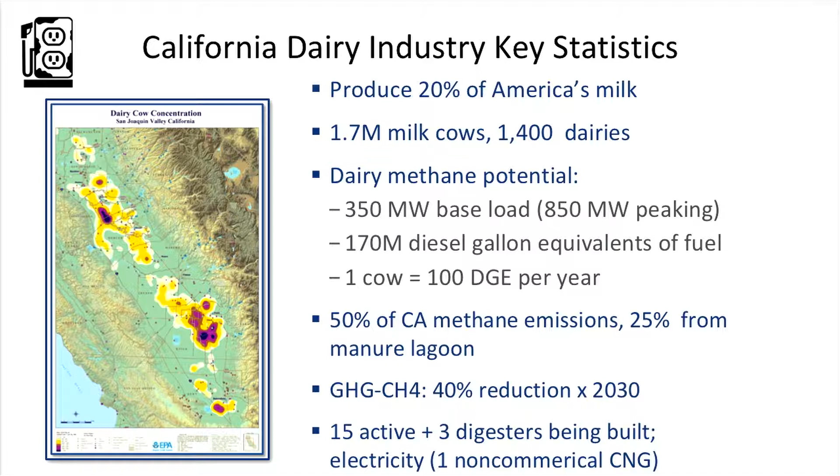The dairy industry in the state produces about 50% of California methane emissions, and then half of that comes from how manure is managed. And so I'm going to show you a bit of how that's done and how we capture it. And the requirement is a 40% reduction of greenhouse gas emissions from dairy manure methane by 2030. To date, there are 15 active dairy digesters, while there are 1,400 dairies, so it's about 1% right now. But there's a lot of development and a lot of activity.

And what's also important is all the existing dairy digesters, with one non-commercial exception, produce electricity. And there's a significant incentive and encouragement for us now to be putting that gas into the pipeline and have it be used to power trucks and buses in the Central Valley. There are major government incentives right now. Just to give you a little bit of background, there are 2 incentive programs to help put initial projects, biomethane, into the gas pipeline. The California Department of Food and Agriculture, from GGRF funding, provided $35 million of grants in 2017 for dairy digesters, and that number increases to $76 million next year.

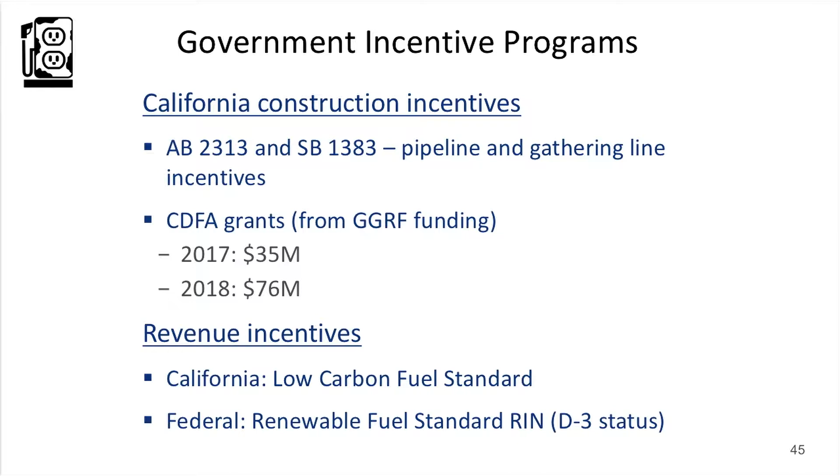And on the revenue incentive side, there are actually 3. I have 2 here. There's, of course, the low carbon fuel standard from California. There's the federal RIN program. And on the electricity side, there's a BioMAT program, which is a feed-in tariff from bioenergy sources, with 90 megawatts coming from dairy and other ag sources. On an investment basis from the state perspective, dairy methane capture is one of the most cost efficient. This is the result of a Legislative Analyst's Office study, and it's about $8 per metric ton of grant funding, government support, which makes it, in this chart, the 3rd most cost effective.

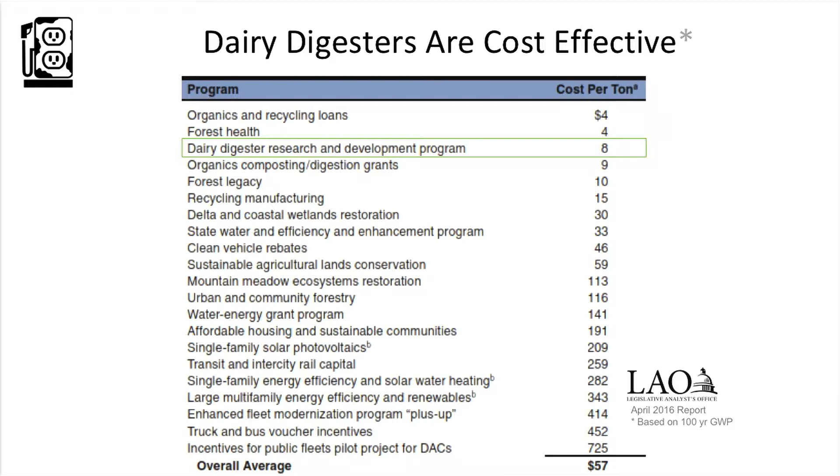So our company was founded in Bakersfield at Wool Growers, if people know the local Basque restaurant, in 2006. And that was a pivotal dinner where I met with 10 of the local dairy farmers, and they helped us create the company. And we thought things would move very quickly, and I had more of a background in technology, and the support structure that I just referred to from the state really only came into place over the past couple of years. And so it was many years of very close work with the Sacramento policymakers and others in helping to develop the incentive programs, and working very, very closely with the dairy industry to make sure these programs work for the industry.

We have built 3 projects. We're completing 3 right now. We're beginning 10 more, and we're designing 25 more as we speak. We were very fortunate that we won grant funding for 10 new projects at the end of October, and that really is going to help define our work for roughly the next 18 months.

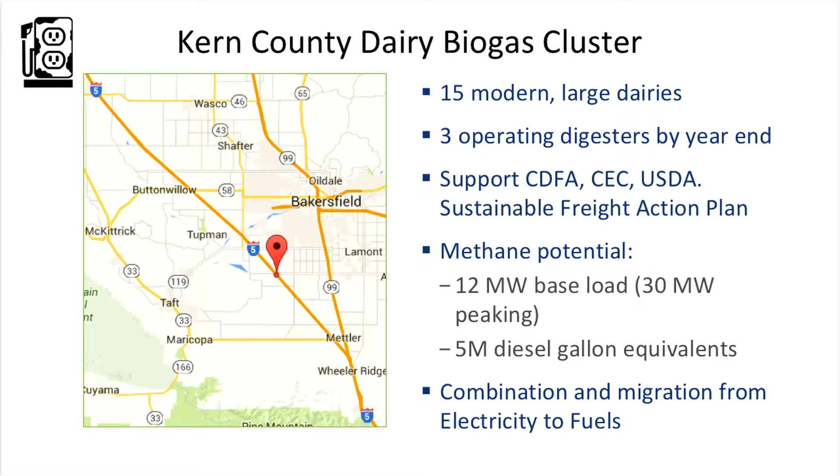And locally, I could not be more grateful for the support that we've had from Kern County, from across the team in Kern County. Lorelei has been very, very helpful to us. And Craig, I wanted you to know that you shouldn't be surprised if you get a phone call from us in the near future about maybe a change or 2. But otherwise, we're very grateful for that working relationship with the county.

The Kern cluster has the capacity for about 5 million diesel gallon equivalents a year, or about 12 megawatts of renewable energy. We began in the Kern cluster with electricity, and we're now migrating so that our future projects will be vehicle fuel. And the 2 of them provide a good complement to each other, with one providing long-term contracts with the utility, while the other is subject to the volatility of the fuel credit markets, but also the incentives of those markets.

I just wanted to show you a few slides of how a digester works. There's a screen up front, which you could see right here. Let me try this out. And this is a slope screen separator, where dairy manure is moved with water. It's a very efficient way. And all the extra water over time then is used to irrigate the local cropland. And it's also a way to disperse the nitrogen, which is then used to fertilize the local crops.

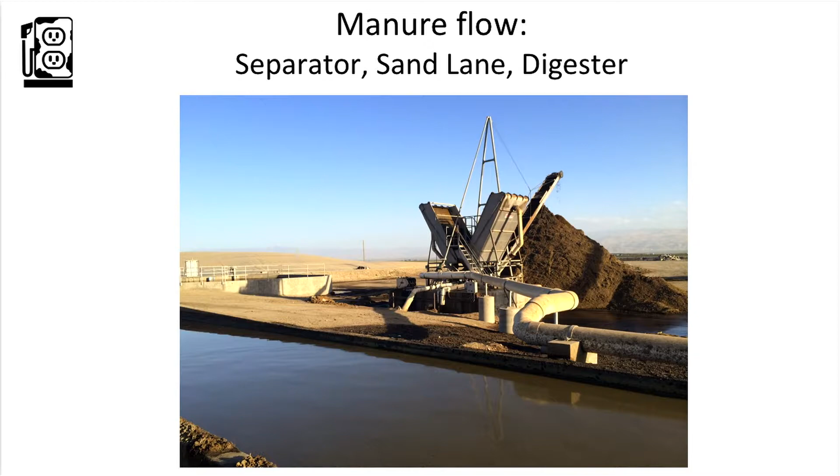So the manure water goes over that screen, and then the solids are right here. And those solids are then put out in the hot sun so that they're cleaned, and then they're used for cow bedding. The most important things to a dairy farmer are the health and comfort of their cows, and then the cows will make more milk. And then the water flows through here, and that is just another picture of that screen, and then it flows through to this lagoon cover right here.

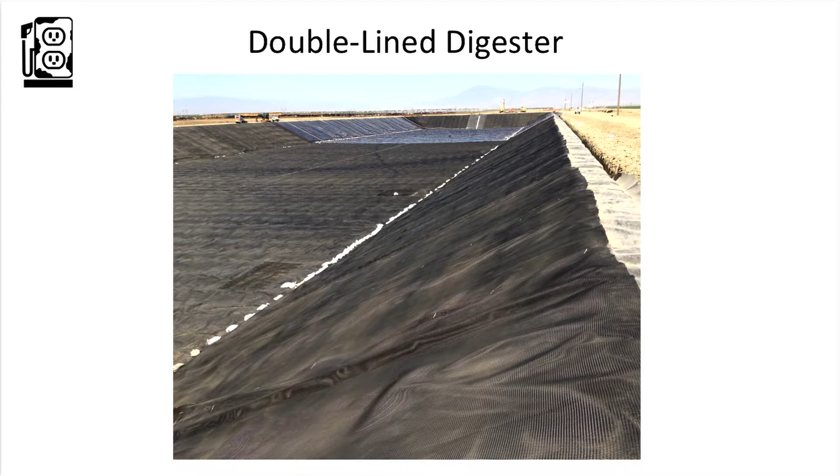The digester is basically a lined and covered lagoon. And this is a picture of it when it was being lined. And it's very large. It's about 3 football fields long by 2 football fields wide. And then there's a whole second unit that's nearly the same size. This is the biggest dairy digester in the state, one of the biggest in the country, reflecting that this is a very large dairy, and it's about twice the size of probably the average that we'll be building over time.

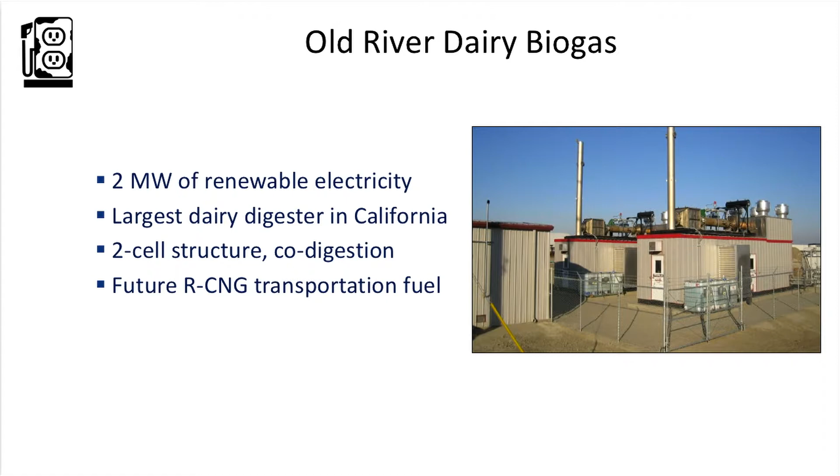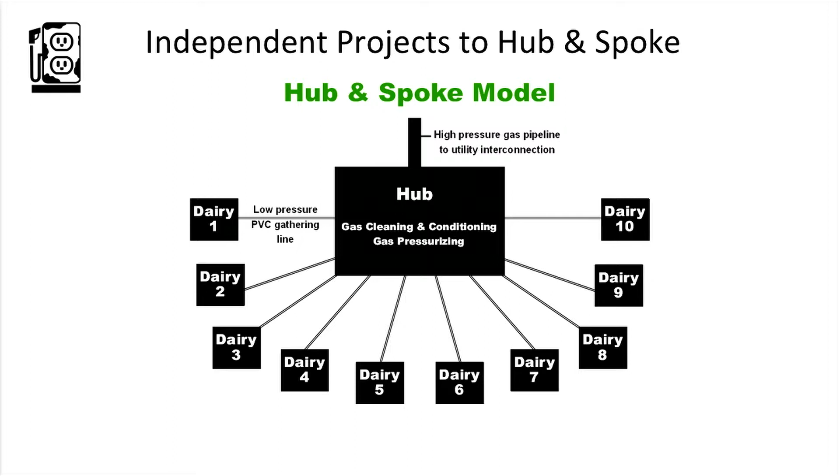In electricity projects, you have a digester at each dairy, and you also have a genset and interconnection to the electricity grid at each dairy. By contrast, on the fuel side, while you still have a digester at each dairy, you're then sending the dairy biogas, which is about 60% methane, to a central location where it's cleaned up and interconnected to the pipeline system.

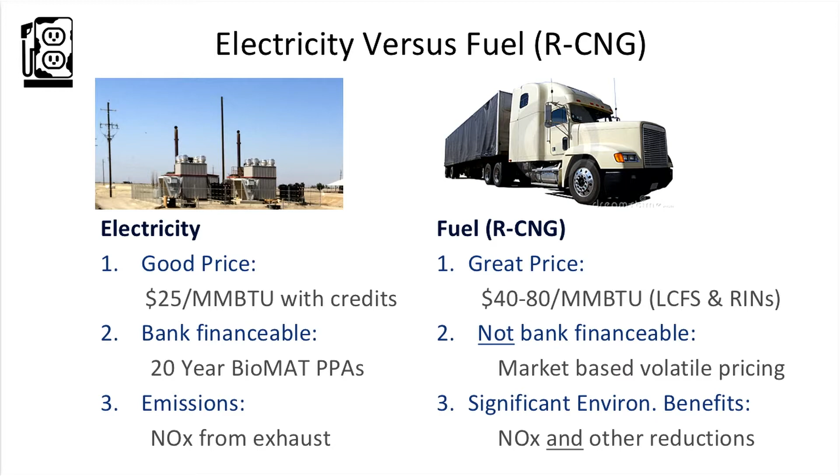On the pipeline side, we could receive a fairly remarkable price, and that is about $40 to $80 per MMBTU, which is made up of the RIN value as well as the low carbon fuel standard value. And thus it provides the economics to be, over time, building these projects, especially once there's more certainty in those programs, so that we won't need the type of grant funding that we've received to date. The advantage on the NOx side is it could then be used for the new fleet of near zero emission natural gas trucks and buses that reduce NOx emissions by about 90%.

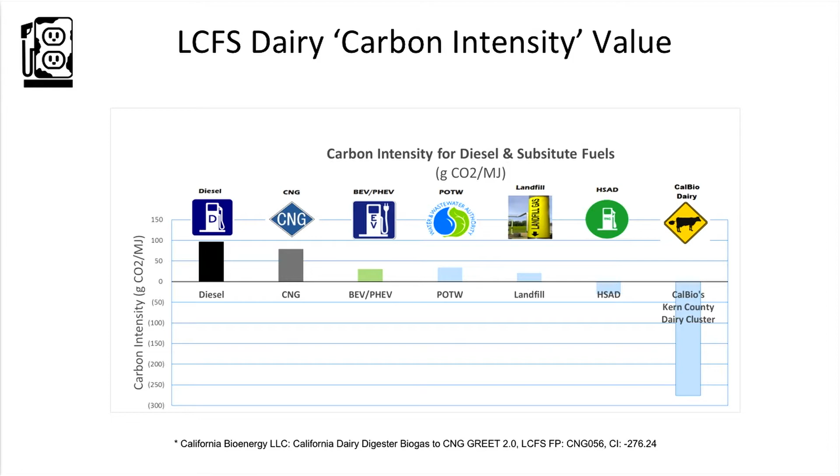And this just gives you an understanding of something so many of you in the room are familiar with, which is the low carbon fuel standard. It works by the difference between diesel and gasoline's carbon intensity and that of alternative sources. And because we're capturing methane that would otherwise be put into the atmosphere, dairies by far have the lowest carbon intensity score that exists, helping provide the economics that can make these projects work. This is just a quick chart to show you the amount of NOx being reduced. One is the avoided NOx by not having the electricity engine, and the other is by replacing the diesel truck with a near zero emission natural gas truck.

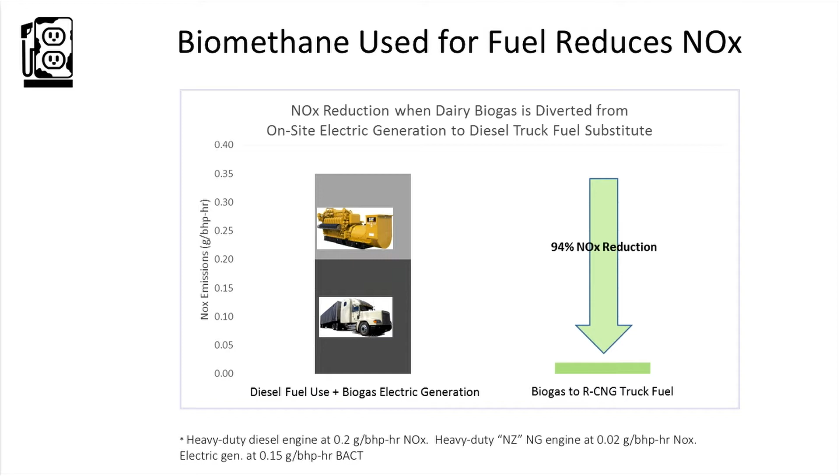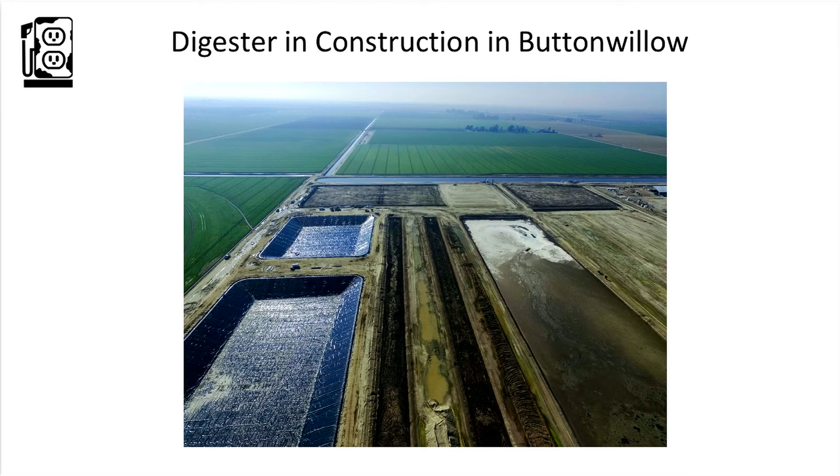And as the state requires a significant amount of diversion from landfills, they're looking for places to take that organic matter, and this would be an example of that. On the right here is the existing lagoon, so you can see how dirty that is, and then it will be going into the two lined cells that would then be covered. We increase the amount of solids destroyed by the naturally occurring bacteria, so an output is a manure water that's easier for the dairy to use and integrate into its irrigation system. This project is also part of a larger study funded by USDA for drip irrigation, for drip tape. It's been studied using its manure water pre-digester, and we suspect the decreased solids and more consistent liquid will be much easier as a starting point for drip irrigation.

So that's my overview of what we're up to here in Kern County. Now I'm based up in Visalia because Kern County is where all the oil and gas industry opportunities are, and Tulare is where all the cows are. So we're following, like all of you, the cows, or you're following the oil and gas industry. And as I said, we're taking that knowledge up to Visalia while we have our major operations and development efforts here in Kern County.